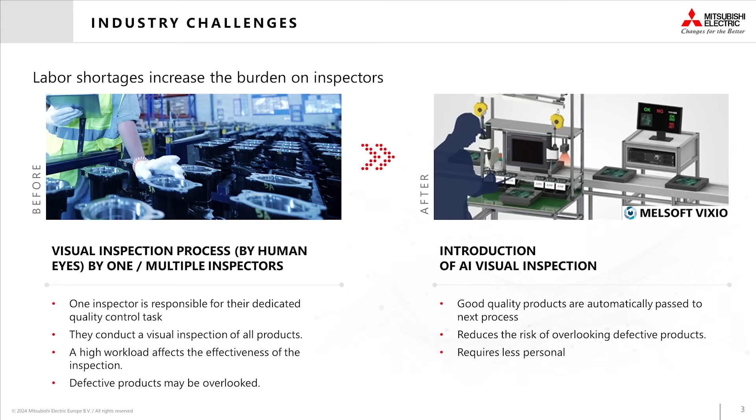But with the visual inspection system, you can automatically pass all of the good products. Only the bad products have to be inspected. So what does it mean for the inspectors? They can take the time where they don't inspect the good products for other tasks, so they can go to other machines, operate those machines, maybe optimize something. And after some time, they just come back to the batch of bad products, inspect it, rework. Therefore it's a very good utilization of the AI inspection system to tackle the labor problems that we face at the moment.

Coming to a similar topic, I think the baby boomers right now are all going into pension, meaning you have all the experienced inspectors that built their experience over a long time. I was once in an air conditioning factory, and I could immediately spot the experienced worker. They swiftly turned around the products, inspected each point of the air conditioning, and they could rapidly decide, is it a good or a bad product?

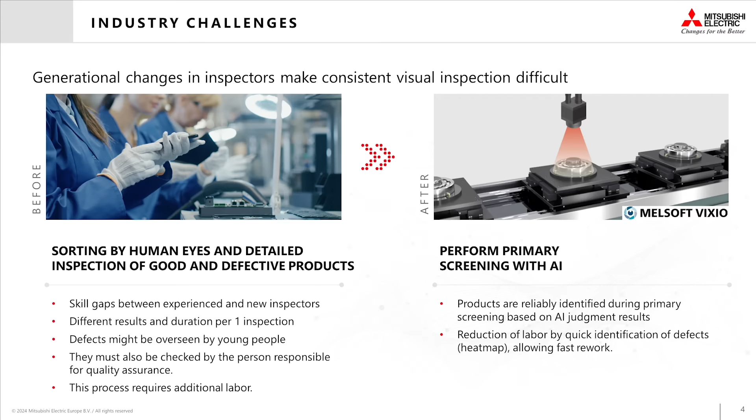Can it be reworked? Do we have to discard it? On the contrary, you could also see the new guys, of course they want to do their best. They want to keep the quality stable, keep the quality high, so they take a little bit longer, thoroughly inspecting everything. But there you can see already there is a big variation in inspection time or quality. So tackling this part as well, if you are using the AI visual inspection system, you are sure that your quality is always at the same level.

Because I think it's a very important point: one issue is the lack of skilled people to hire in the company. But even if you have them, it takes tremendous time to train them to the level of those experienced people who are leaving. We do experience this issue across different industries, that experienced people are leaving their jobs. So knowledge retention is another huge challenge, and I think some sort of standard process for visual inspection could be an answer to that.

I think you briefly mentioned this, but we need to underline the point about how visual inspection is done today. It is pretty much heavily based on certain rules, which are not always perfect, and each process requires modifications of parameters of the visual inspection and so on. Maybe you can elaborate on that as well.

Exactly, and I think here also lies the difficulty we see at the moment. Everybody wants a one-lot production at best, meaning you have lots of product variants. In traditional rule-based inspection systems, for each variant you have to create this huge list of rules. But then, as an expert of the products, I also have to think about all the outliers that could come, all kinds of defects that could occur. And we're all humans—we don't want to spend hours and months thinking about what could have happened or what could happen, and then for this very rare occasion, also making a rule.

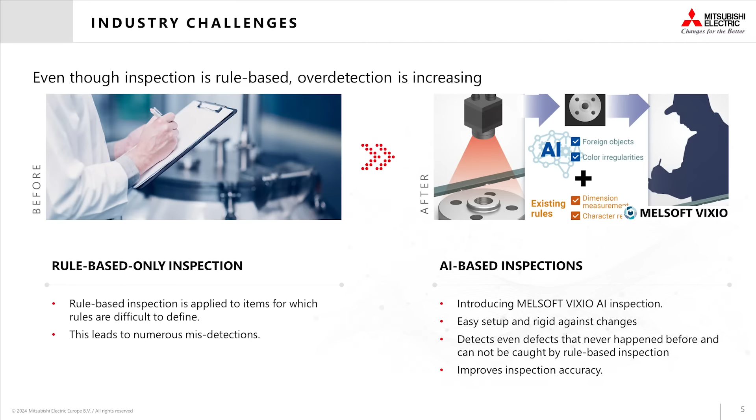Exactly. So maybe, because I think this rule-based versus AI-based approach is the easiest to imagine, could you tell us how AI is completely changing the approach to visual inspection? Yes, so if you think about it, you are utilizing your good products, taking a bunch of pictures that you probably already have—let me give you two examples.

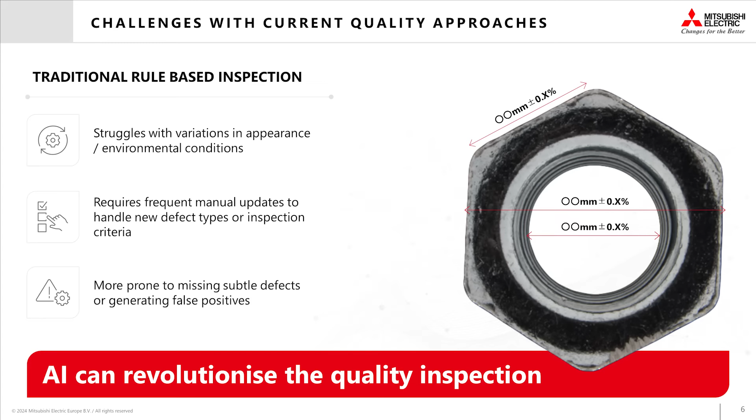On the one hand, you most likely already have good pictures. On the other hand, the visual inspection system doesn't interfere with your production, meaning you can simply put the camera system on top of your production line—it does not interfere at all—and you can gather the good pictures. And it's as simple as that: you just take all the good pictures, train the AI, and then deploy it on your machine. It's basically a three-step process which can be done within minutes, instead of having to create a huge list of rules that you need for each variant at the end.

I think we can agree that adding the visual aspect to the quality control process is not problematic for most companies, because in the end that's just a module that checks, takes pictures of the product and sends it to the analytics software. So how about the software itself? I think one common understanding is that implementing AI itself is complex, and implementing something that can understand the content of a picture is quite problematic. So how do you handle that to actually make it easier for the user?

Yes, you're right. So when talking about AI, the first thing that comes to mind is, do I need a degree? Do I have to be a data analyst, or have special programming skills in order to create the AI model itself? This was one of the main development parts we focused on—it has to be accessible for everybody: the operator, the development team, or anyone creating a new variant. It has to be easy, it doesn't have to take a lot of time, and you don't need any programming skills for that.

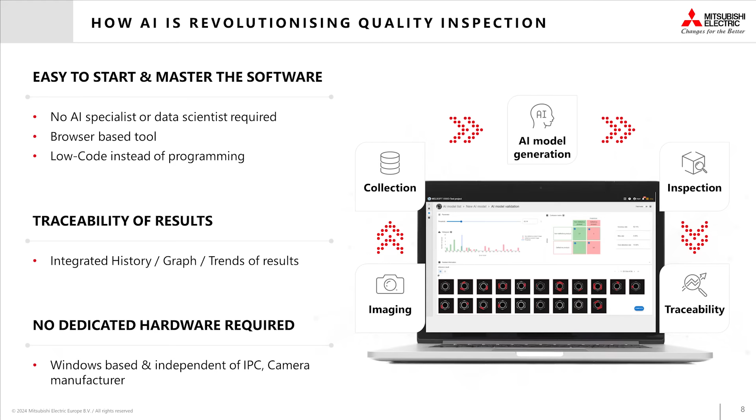And as a matter of fact, I did it already many, many times by myself on my computer. So it's a piece of cake, and I will show you that later on. But maybe we should delve into this a little bit.

So why is it not as complex as a traditional AI implementation? How is this particular approach different from, let's say, general purpose AI models that can be used in these applications? Yes, of course, the AI model here is specifically designed for the visual inspection task. So in step 1, we are taking good pictures and teaching them to the AI. The AI then creates a model specifically for the good pictures.

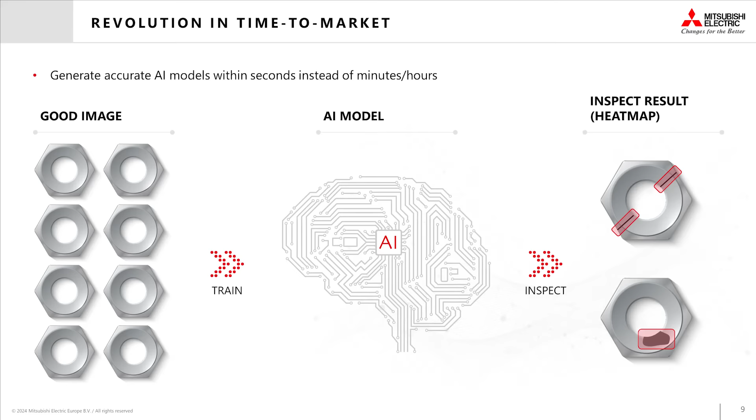So everything that is outside the norm, anything outside your tolerance or your high quality standards, is observed, and as soon as a bad product comes through production, it will be flagged. Here it is also very important that the operator has a very clear picture of what the defect is. So we have the heat map where you can simply see the bad spots. Then the inspector could say, okay, I can rework it or I have to discard it. So it's a very simple process for the operator to decide what to do next.

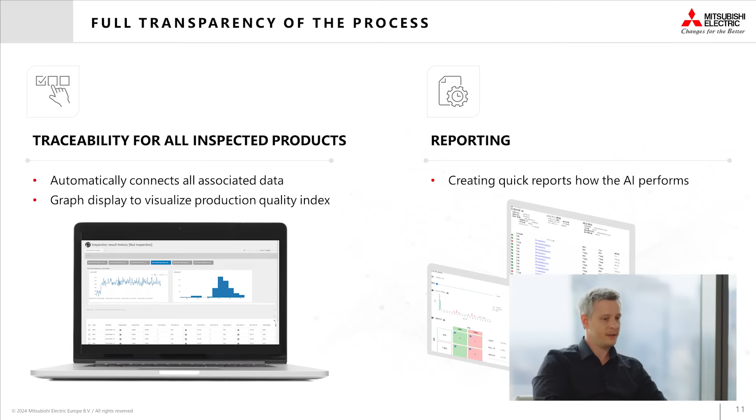What is also crucial, not only for the operators but also for the manufacturing staff, is to see the trend of my production line. This is also all embedded into the software. You have easy real-time analysis, so you can see each product side by side, what the defect was, what the quality value was. On the other hand, you can also see the historical quality trend.

So imagine you're producing and you see a slight shift in quality. Positive is always fine, but a negative shift, of course, you want to prevent as fast as possible. And this is even possible at the operator level. They can do everything in their hands, maybe shifting some parameters, shifting some recipes. But if that doesn't work, then the maintenance team, for example, could come and prevent the quality shift so that you are not producing bad products.

It seems that because the solution is on the factory floor and close to the process, it definitely makes it easier to set up and also easier to maintain and improve in future, right? Yes. I think the important part here is that creating a new variant, let's say you decide to make a new product, just takes a few minutes.

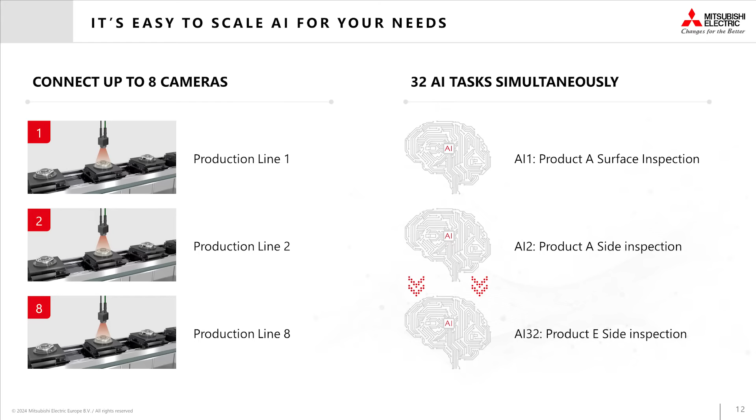You can do it with just one inspection system, one camera, but it's also very easy to scale it up. For example, beyond one inspection line, you can inspect up to 8 inspection lines. So basically 8 cameras can be connected at the same time, and up to 32 AI models can be simultaneously executed, allowing you to inspect not only one line, but many processes or many lines at the same time. So it's very easy to scale the whole software.

All right, but you also mentioned before the speed of delivery of the solution. I think this is also affected by the amount of input data, right? So how do you address the point that the AI has to learn a little bit about the product to inspect it later? Yes.

Of course, AI is always a process. You can start with as few as 20, 30 pictures of good quality products. And then after, let's say, a week or so, you check the confusion matrix, meaning what was the accuracy of your model? Are you satisfied with it? Do you want to improve it?

And since you constantly gather new pictures, you can then just streamline them and feed them back to the AI. And since it only takes a few minutes, you can then upload the new AI and you have a higher accuracy level immediately.

Maybe what I also didn't mention in the beginning: we always have to think about it. The human inspector always takes a lot of time to inspect each product, right? But with the software, it's just a few milliseconds until you have the decision, good or bad product, and you can then proceed. So that also benefits your overall OEE by pushing out more products at the same time. So maybe we can show it.

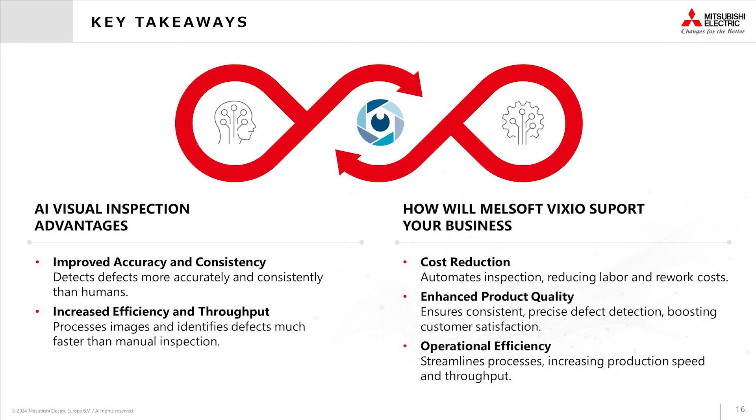So, okay, I think that this is another use case that shows, in my opinion, how manufacturing can be transformed by AI. However, the AI that is close to the production, right? So you want to allow your AI models, whatever they are, to really understand the context of the production site. And I think that this is another example that exemplifies how important the edge level of AI is.

Very good. So maybe as a finishing touch, maybe you could tell our audience what they should remember from our discussion. Yes. Some key points that should stay with them. Of course, when thinking about the production line, OEE is one of the key factors that everybody has a look at. And with the visual inspection system, you can increase the OEE by a lot. Just by, for example, having the high accuracy level, you have the constant quality inspection, so there's no variation, and also you are much faster in that regard as well.

Also, I would say you can think about reducing waste or other material. And what do I mean by that? So if you install the inspection system before some process that is utilizing, let's say, a lot of material, if it's a bad product, there's no need to process it any further. You can discard it right away. So you're saving money here as well.

And of course, also the flexibility that we talked about many times today, that the creation of AI models is so fast that you don't have to care about having a new variant. You can create your AI model in a short time and you're ready to go. So overall, I think these are great advantages that we are creating now with the AI inspection model.